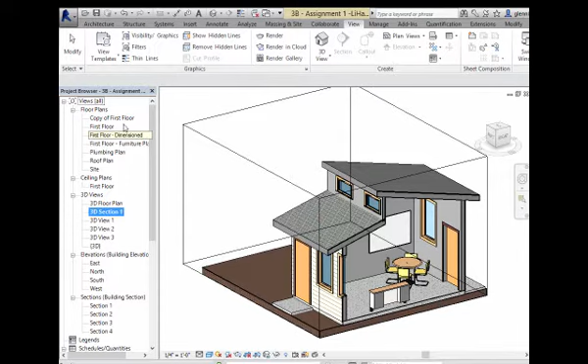Okay. The guideline says that the desk should have about 40 to 50 feet. That's kind of like a 5 by 8, something like that. What Han's actually done here with the desk is kind of okay too. All we really care about with the desk is that you have enough room that you can roll the chair back, and you're just aware that objects actually have a little clearance room that you have to leave for them too.

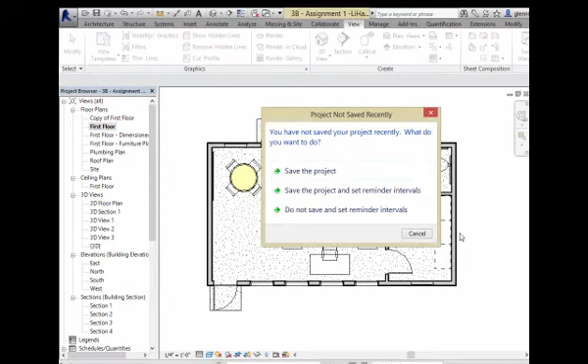A really good question. An eagle-eyed observer noticed that Han found this really groovy whiteboard component somewhere. So where'd you find that? Just Google whiteboard Revit family. I can get the website. From like Revit City or it was some website. Yeah, no worries. So, was that? I just found it on Revit City. Oh, good. Beautiful.

Do two things. A, be opportunistic about finding things. You don't have to model everything from scratch. B, when you find things like that, share them with each other. So actually, Lottie, why don't we even do this? Let's set up some space on the CEE server where people can just, in fact, I promised to put my BIMtopia library out there to share all my pieces with people.

Let's make a deal that if anyone starts finding cool components, we share them with each other and put them in a big master library. Because really, it's like crowdsourcing. I want the power of 50 to all help us help each other. So keep track of some of these individual components you're using, and we'll get this set up in a way that we can start sharing them. We all have very similar needs, so we might as well start building a common library of some of these things.

Okay, let us go ahead and proceed to talking about annotations. That's the next step in this whole process. And to do that, I'm going to switch over to this view that we call the dimension view. So here's the deal. We didn't ask you to put annotations on the first assignment, but you can if you want to. Again, because I said that, don't immediately rush out and do that. You don't have to for the first assignment. But here's where it's going. From here on out, we'll start annotating our drawings and putting dimensions on them.

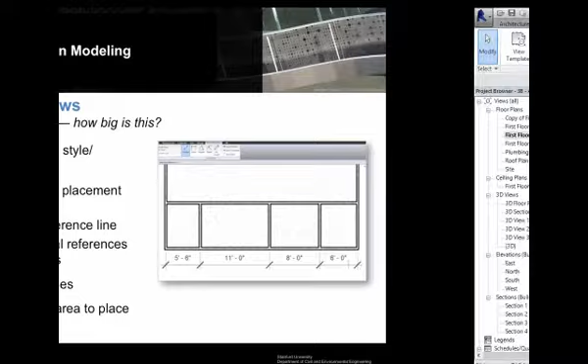We always go through and put something in called a witness line, and we can point to reference lines in the walls and pick those. Let me show you what I have in mind as we go through and pick things for doing dimensions.

So back over here, let's start horizontally first. I want to go through and put some dimensions all the way across this building to illustrate things. There's a couple of questions we might answer.

Just so I can see things more clearly, I'm going to temporarily turn on something called thin line view, so the thickness of the lines isn't obscuring the detail. To do that, under the View tab, choose Thin Lines. It's also up here. What Thin Lines does is make it easier to spot the layers of the wall when I'm zooming in.

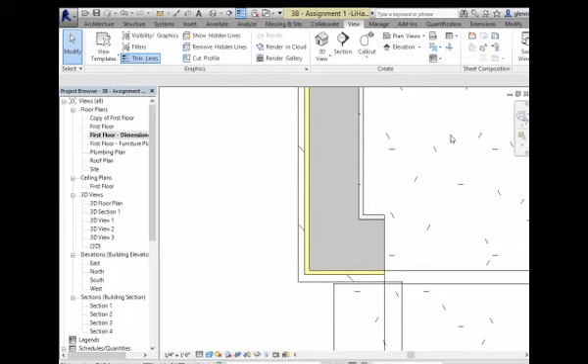So let me come back over here. So I've got Han's walls. Here's what I'd like to do: I would love to have a dimension that shows me just the entire length of the building. At a high level, the biggest thing I want to know is how big it is - how wide, how tall - just to figure out if it's going to even fit on the site.

So how I can do that is I go to the Annotate tab and choose from these many different types of dimensions. I have aligned, linear, angular, radial - all sorts of different types. Nine times out of ten, you're going to use aligned.

What aligning does, just so you know, is it'll go through and follow a wall surface. So if you have horizontal and vertical walls, or walls that line up nicely in X and Y, it'll present those just fine.

Let me see if I can get the help to show up... it isn't going to. Trying to get something to pop up, and it's not helping.

Okay, aligned dimensions go through and follow the wall - so if the wall is moving diagonally, the dimension will follow the wall. Linear dimensions do the other thing: if you have a wall that's diagonal, it'll measure it in X and Y - horizontally and vertically. It just depends on how you actually want to show the dimensions.

So let me see if I can get it to pop up again - that's angular, come on linear, give me the balloon... it's not going to do it, just because it doesn't want to cooperate with me. It's going to pop up in just a second when I don't want it to anymore.

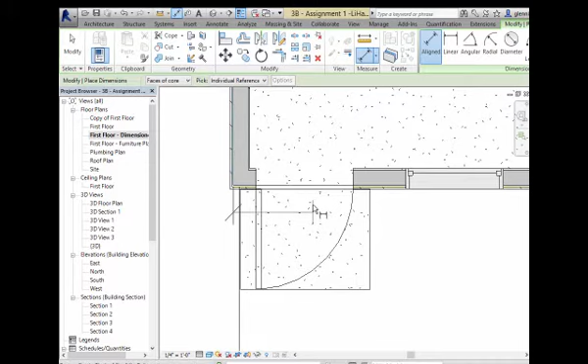I'll come back over and grab this one over here again—inner face, outer face. I'm going to get the outer face and put that dimension in.

You see, it doesn't make a huge difference, but it does make some difference. It's really 31 foot 4 3/4, versus 31 to the wall center lines. We'll learn to be precise about that, but for this assignment, don't worry if you're not precise. If you have everything just hanging to the wall center lines, no problem.

But ultimately we start wanting to dimension to the face, and the reason is if you think about how this thing is going to be built—you're probably going to put the concrete slab down first, then someone lays out lines on the slab for where the walls will be. When they measure, they'll figure out where the edges of the wood walls will be, not where the outer surface is. They want to measure to the face of where they're going to build, and that's why we go to the faces of the core.

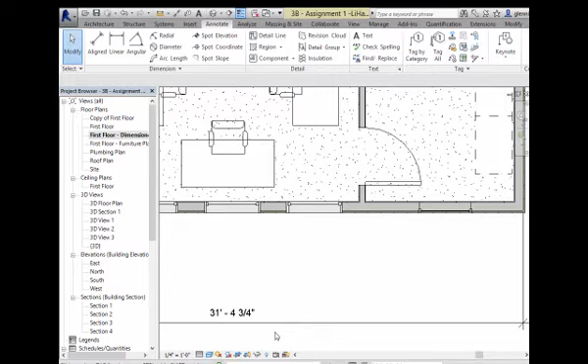So a really good dimension to put in is a big overall dimension, and maybe I'll do one in the other direction too, from the outer face here to the outer face here. So at some level I know this is a 31.5 by 17.5 foot building. If you gave me no other dimensions, that would at least get me going—I'd understand at a high level where this thing fits on the site, what's going to happen here.

At a second level, here's what I'd love to see—to help the person who's actually going to lay out and place this wall and that wall, it's really good to have a second dimension showing the distance to the walls that intersect the exterior. So for example, I'd love to have a dimension that goes here to here, and another that goes here to here. I like them both because I can then measure from this side or that side and get both pieces of information.

So I can create the dimension by coming over here. For this middle wall, you can decide which side to go to, the left or the right—doesn't really matter, just be consistent. I can put a dimension in here, then come over and put a second dimension here to here and drag it in.

Now that was kind of okay—I managed to get two different dimensions in there, but you might actually start to think about this not as two separate dimensions but as a single long dimension. That's actually a better way to put them in. The reason it's better to put them in as a string of dimensions is that if you go through and move one, you'd like the other to move too—you'd like them all to work together.

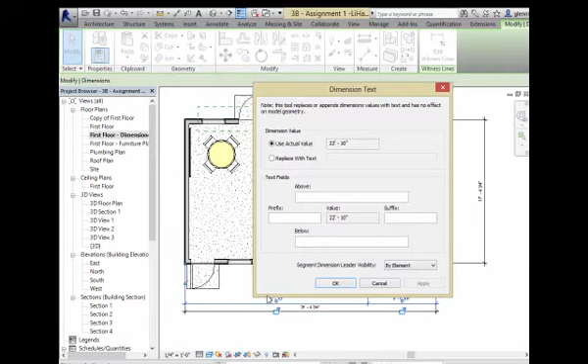If that's not what you're after, if you really just want to move something, select the thing, choose the wall, and it'll activate the dimension. Notice there are actually two different dimensions shown right now: the dimension you placed, and also the temporary dimension measured to the center lines of the walls. Just use whichever one you want. If it's blue, you can edit it. That's basically the rule.

So we'll put a dimension that way. I'm going to put a dimension going in the other direction too, from this wall to that wall. You might have to zoom in to get it accurately. I'll come back over here. So we've got dimensions going in two directions.

This is a pretty darn good looking set of dimensions. I actually like to pull dimensions and be consistent about it. You'll find that as you're putting your drawings together, you could have dimensions all over the place. The big walls are probably enough to get the dimensions you need. You probably don't need to show the dimension between here and here, or a lot of other dimensions at this point.

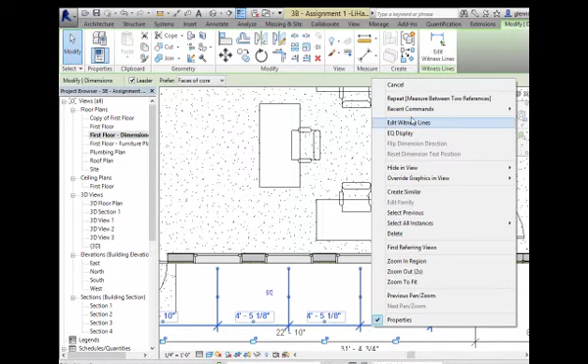If you want to change something about the dimension line, for example, I'll go ahead and extend it. I'll edit the witness lines, take it over and add that in there again. The dimensions seem to work out pretty good. But I tend to put dimensions in floor plan views. I tend not to put too many dimensions in elevation views.

Because in the elevation views, a lot of the information that's critical, that the first floor is at 0 and the roof's at 9, is already there. So you don't need to dimension everything on every drawing. In fact, it's almost better not to. It especially used to be that way when things weren't automatically dynamically connected. You'd put a dimension on one drawing, change it on one drawing, and it wouldn't change on the other drawing, and there'd be an inconsistency. We don't have that problem with BIM modeling anymore.

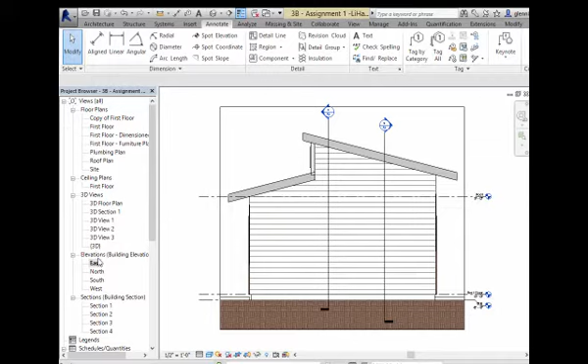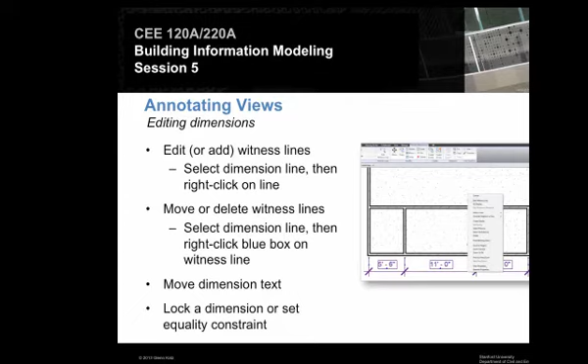But it's good to put your dimensions in a very consistent place so people know where to look for them. So it's nice to have a floor plan view that's nicely dimensioned. Okay, so dimensions is definitely the start of where we're going with all this. You can edit the dimension lines by changing the witness lines. That's these little guys over here. And within all that, there's this whole notion of the equality constraint.

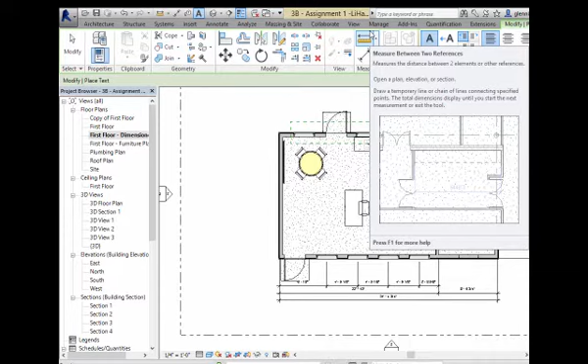The next type of annotation I want to tell you about is just a piece of text. And that's easy. You don't really need to spend much time thinking about that. On the Annotate tab, there's a text tool. Use text judiciously. Now, there are times when you just run out of time, you can't find the perfect part to model it, or even here, it may not be perfectly obvious that that's a whiteboard from just looking at the floor plan. I can tell it in the 3D view.

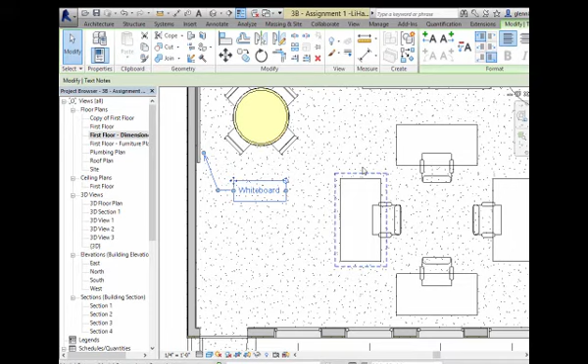So if you need to, just go ahead and put a whiteboard in there. I'll say that, hey, that is basically a whiteboard. And add little pieces that are going to help tell the story. Now, text doesn't have too much in terms of interesting properties. There's a notion of different sizes of text and the font style and stuff like that. Those are all type properties.

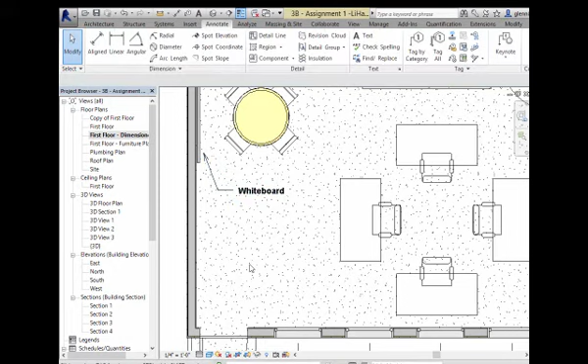So for example, I want my 3/32 inch Arial type family to be bolded. I can turn on the bolding. Just so you know, by default, that's the size it would actually print out on the sheets, 3/32 inch tall. Now, I tend not to do it that way. I'll set up some types based on the use of the different types of text. So for example, I will create a type. I'll duplicate this, and I'm going to call this my floor plan notes.

Okay. And then that'll have one specific type and style. Then I'll create another type for a different use and give it a different type and style. And it's actually a little more powerful for you to think about the use and then be able to control things based on the use. Because if it turns out my floor plans are getting really crowded, I can change all the floor plan notes and just shrink them up a little bit. That won't affect everything. So, start thinking about things in terms of how they're used as opposed to just literally the size. Okay, so you can do that.

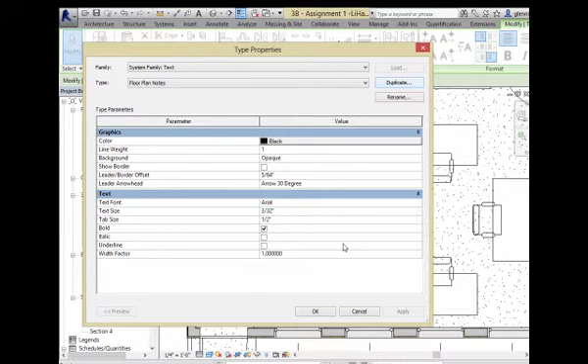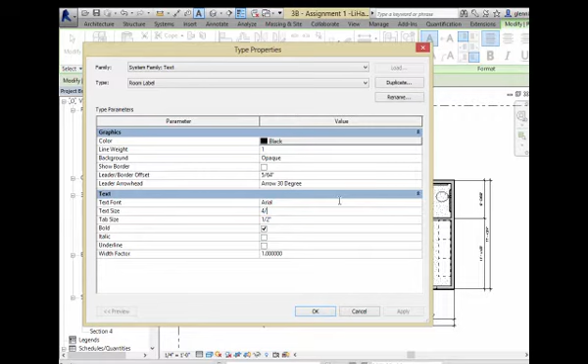Another thing you can do is, I'm going to put just a label on some rooms. So I take a piece of text. It won't have a leader. Let me create a type for that. I'm going to say that there's going to be some sort of a room label. And that'll be a little bit bigger. Instead of 3/32, I'll make it 4/32. Okay. And this is going to be my workroom. Or storage, or whatever I want it to be. Again, I can center that, move that around.

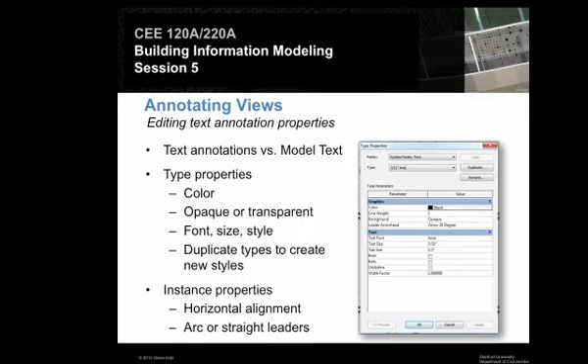Most people get the idea of text pretty easily. Text is kind of cool, but it's not quite as powerful as the next thing we want to show you. So, file text away, it's useful, but really pay attention to the notion of something different called a tag. Okay? Tags are like smart text. Tags are all about putting markers in the drawing that refer to information that can be pulled out of the building information model, pulling text out of the database that's behind it. So we have lots of choices about what we want to show.

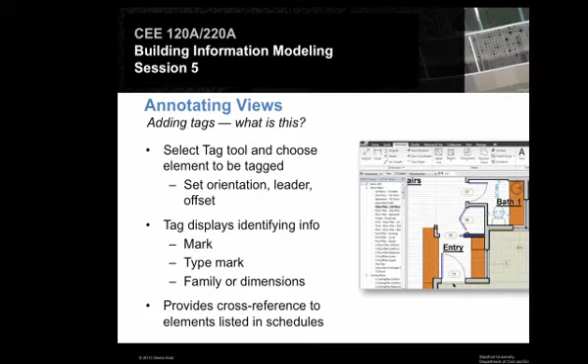A very common type of tag we put in is door and window tags. Because you have this window hanging out in the floor plan. It's looking okay, but you'd really like to identify that window in some way that you can correlate it back to what showed up in the window schedule and tie that all together. So let's come back over and take a look at your window schedule. I have some windows in here. I have type 46 windows, type 74 windows, type 76, and type 77.

Okay. The windows are actually showing up with what's called a type mark. A type mark is an identifier that's common to all the things that share the same type. You can keep them like 46, 74, 76, 77. That's the default. I tend to name my windows A, B, C, and D. But it's just some marker that links this piece of information in the schedule back to what's going on there. If you want to change your type mark, no worries. Just put a new mark in here. It's going to change all of those. I'm going to say fine. That's going to be my B window.

What am I doing? I'm just changing values in the database. But what I'm doing is changing all the windows that have that same type. And again, use whatever scheme seems to make sense. I like to keep my type marks very simple. I tend to number doors and put alphabetic designations on windows, but every office has its own way of looking at this. So I just change those designations. So I know the A window is 3x4, the B window is 3x5. Okay, that's looking pretty good.

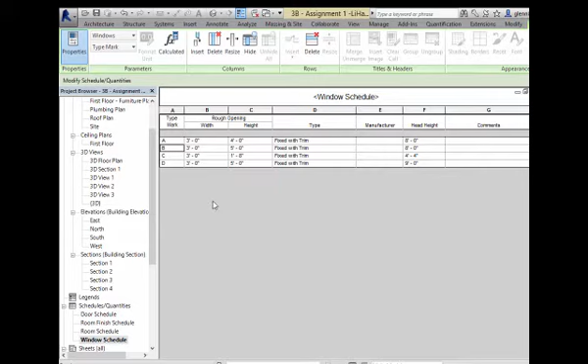Let's go back over to the floor plan. I would love to identify the windows here so you could tell whether that was a 3x4 or a 3x5 window in the floor plan. And how you do that is we use this thing called the tag. Tagging shows up under annotation. It's next to text, the next thing on down. And tagging works like this. I can tag by category.

Within that, I have this notion of something called a leader. That's like a little line that connects the tag back to the object. I'm just going to leave that in for now, accept the defaults. I'm going to hover over that window. And notice when I hover over that window, it's going to say, oh, that's a window D. That's a window D.

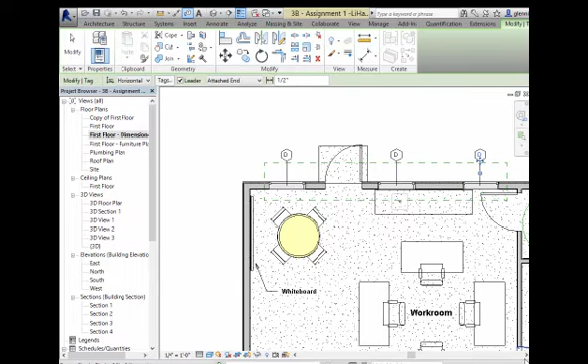That's a window A. That one's a B. See if I can get it on the outside. Oh, actually, it's going to sit at the outside. That window's actually probably inside out right now. We'll figure that out in a second. If I choose the window, let me edit them. Yeah, the inside's out, so I'm going to flip it out. I'll move the tag over to the side.

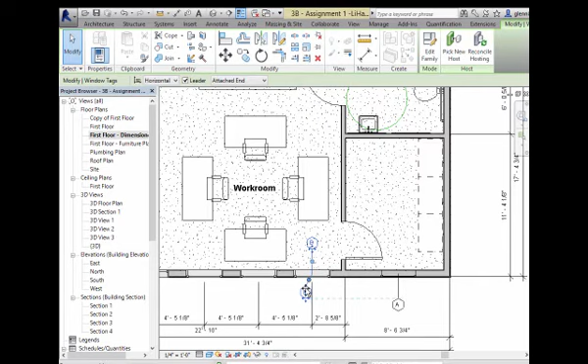Okay. But tagging just gives you an interesting way of connecting things back. The cool thing about tagging again is I can look at the floor plan, tell that the A corresponds with that schedule. So I got my A's, I got my B's. Sort of gets to a question that some people have relative to the assignment. People are sort of saying, well, where should I put the schedule? Like in the sheet views.

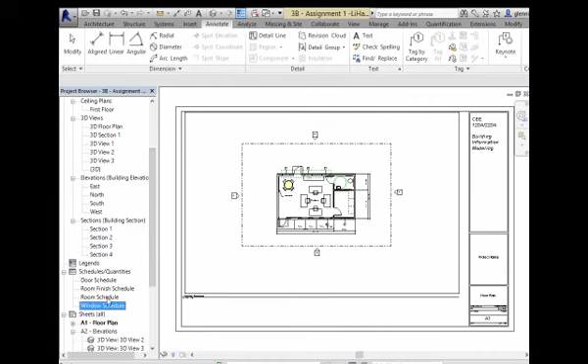And what I'll tend to do is, if I got my floor plan view, and actually what I'm going to do is put the detailed one in there instead. Or dimension one in there. It's a little big right now. I'm going to crop that down in a few minutes. But what I can then do is take the window schedule and just put it in the same view. And the nice thing is if I do that, someone reading this thing can say, oh, B, B, A, and read the information they need. Get more of the story told just kind of in a single view.

So tagging actually works out really well in floor plan views. What I tend to tag as a starting point, you can really tag any of the objects. Again, the tags are only a single view. I'll tend to tag the windows and the doors just so I can get the corresponding schedules. So I can go back to annotate. I'll tag that one, that one, that one. If you got to put a lot of tags in there, I'm going to show you another way to do it. Let me just flip that one. Leave the odd man out.

Tag by category. Another thing you can do is actually just tag everything that is of a certain category. So it's not going to be very dramatic. There's only 4 of them here. It probably wouldn't be that hard to tag them individually. But if I want to tag all the doors really, really quickly, as opposed to just tagging by category, I could go ahead and say tag all, and it'll give me some different categories. Well, what things would you like me to tag? And I'm just going to choose doors right now. So I'll say all objects in the current view, so all the doors in this current view.

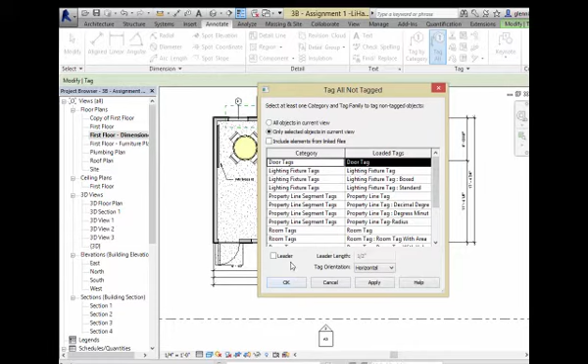I could say all the objects on the selected objects. You can sort of get a choice. You'll notice there's a lot of things we can tag in here, rooms, walls, and stuff like that. I'm not going to tag them all, but all the information is available. You could go through and tag any walls to show what the wall type is. You could tag every piece of furniture to kind of show a little bit of information what it is. I'll just stick with the door tags for now. I'll give them a leader. And I'll say either apply or OK.

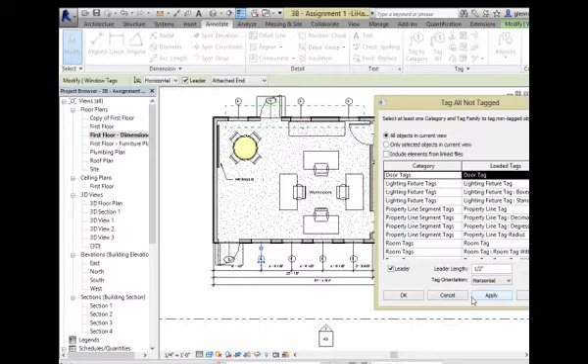Actually not showing that there. Let's see if it's OK. Why are they not showing? Let's go back. Tag all. I'll think about that in just a second. Oh, instead of the selected object, I'm going to choose all the objects. I'm sorry, that's what it needed to be. Okay, so that'll put the doors in. You'll see that's door 3, that's door 4. Over there is door 1 and 2. There's door 1 and 2 over there.

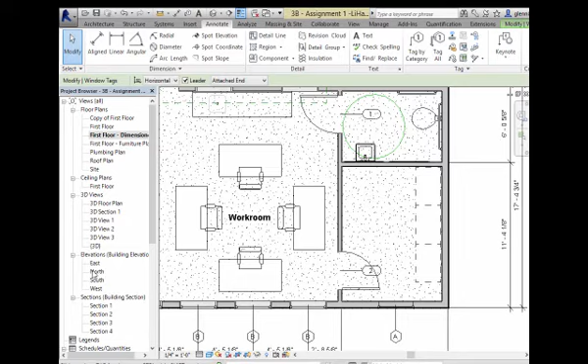Tagging is sort of a really good way of getting things put together. A nice thing is, if you have the doors and windows tagged in the floor plan view, you can also tag them in the elevation views. That's actually kind of a nice thing too, so people can make the correspondence between the elevation. So over here, I got that view of the front of the building. If I would like to tag that, I can say annotate. Let's go ahead and I'm going to tag all the windows.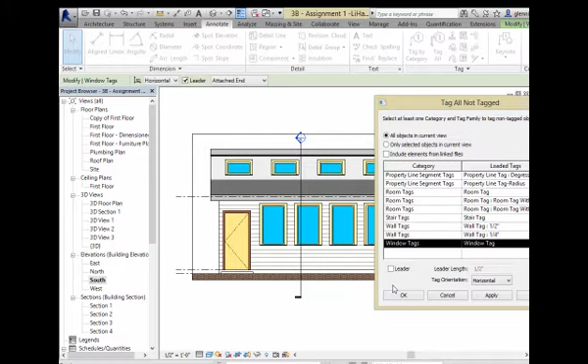I want to get the doors too. I can get that; I'll Control-click to get that. Let me say all the objects, all the doors and windows in this view. I won't put a leader. It'll sort of show up in the center. So real quickly, I have this, again, correspondence between all the different windows and the callouts for what they are. So tagging is a really incredibly useful thing.

And we're going to learn to go through and actually change the tags so that as opposed to showing the type mark or the individual mark, we can show the family name or the height or the width or whatever property. Any property that you can pull out of the database can show up in those tags. Okay, anything you can put in a schedule can show up in those tags.

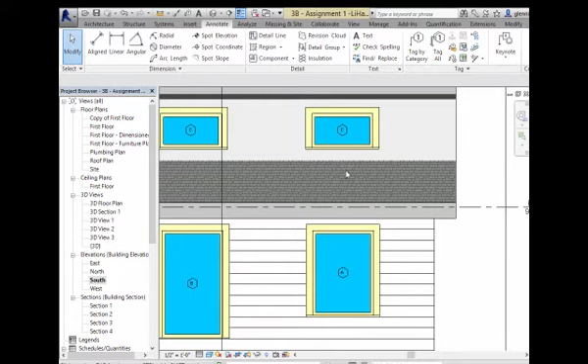Is it too much to put all the dimensions and all the tags in the same plan, or should we do two different? I tend to keep them together. So yeah, I think a good looking floor plan often has dimensions and tags kind of all hanging around in there together. You might want to take the furniture out or something like that. Like in this dimension view, if this is looking a little cluttered, I can go to visibility graphics. Maybe I'll take the furniture out.

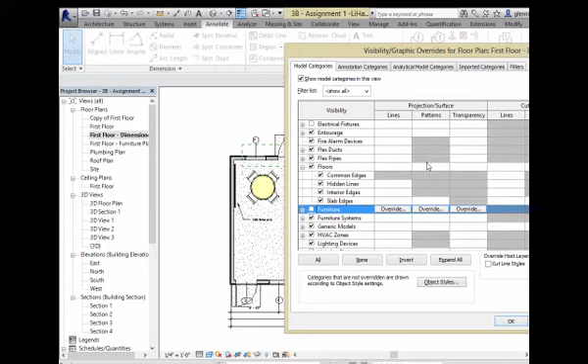Maybe I'll even turn off the shading in the floors because the framer probably doesn't really care about that pattern on the floor. Architecturally, I do. But you know, maybe that looks a little bit cleaner. You sort of think about who's really looking at the drawing, what information do they need, and try and give them just the information that's going to be most appropriate. Because excess information may just clutter things up and kind of confuse them.

Okay, so we've got these different types of views. We've got these floor plan views. We're annotating them. That's kind of cool. Let me go through in our last little bit together this morning, talk about just some of the other types of views, how you create them, how you control them, and get them on the sheets, including schedules. So, Lottie, don't let me get out of here without schedules.

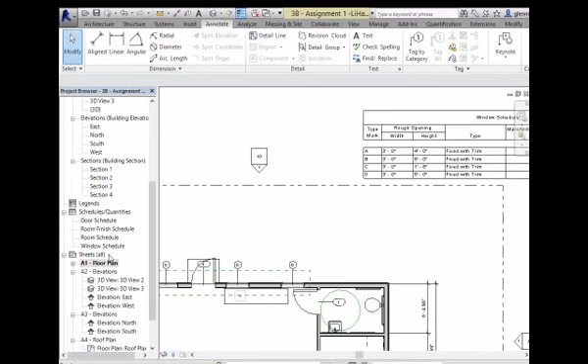Okay, so here's what we're going to do. You got this view, and this view is looking pretty good. I'm ready to drop that on a sheet. You might notice that it's a little big when I drop it on the sheet right now. So one of the things I want to do after I make sure the information's there and I get it all tagged up the way I want, is just crop it down. Cropping is this example of what I call tweaking the drawing to really make it look the way I want it to be. So it's a little bit big for the sheet right now.

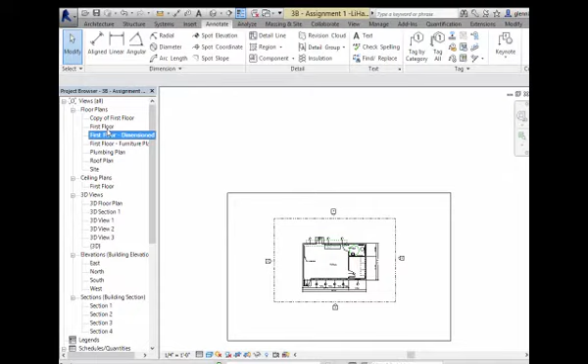If I want to shrink it, I'll choose that view. That's the cropping boundary right now. You decide really what you want to show. If you don't really care about seeing the property line, you just want to see the building, let's pull the crop in so that you're not paying attention to those things. So I can pull the crop in on all sides. Okay. And it'll be much smaller. We can get several different views on the sheet now.

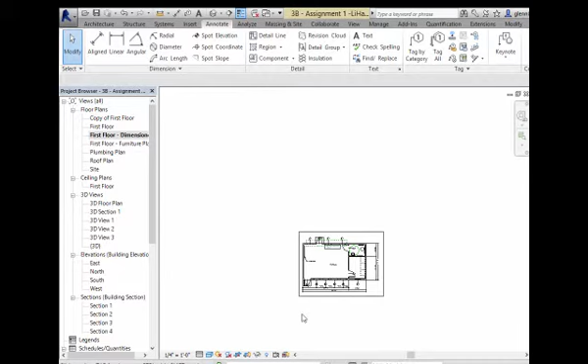Let me go back over to the sheet. Okay, it's looking much smaller. Now I can have room for actually that schedule and the floor plan to be on the same sheet. Now, just as a matter of nuance, the first time you drag a view on the sheet, it actually figures out where the title bar should be. And it still leaves the title bar, even though I changed the cropping, in the old place. Okay, so you could go back and adjust this manually.

There's this whole thing of choosing a view and then being able to, oops, choose the title bar, drag it around, resizing it. I can play that game and do that. There's actually an easier way, so let me tell you what that is. If you ever get your title bar out of sync with the view and you want to fix that quickly, just delete the view from the sheet and put it back on the sheet again.

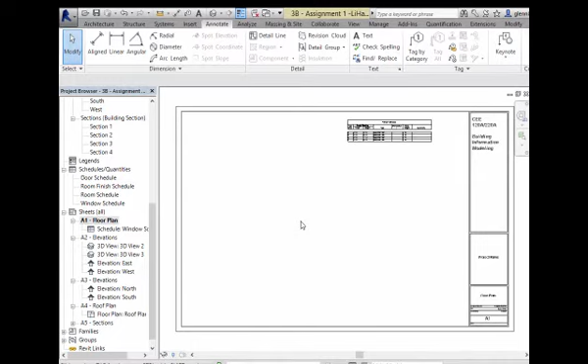So here's what I mean. Here's that view. It's hanging out on the sheet. Goodbye. Don't worry, it's still in the model. It's just not on the sheet. I'll come back and grab that dimension floor plan. And when I pull it back in, it'll resize the title bar just right at that spot. Okay, so now I've got a nice dimensioned, tagged view. I've got the schedule there. Maybe I'll put the door schedule in here too. Things are looking pretty good.

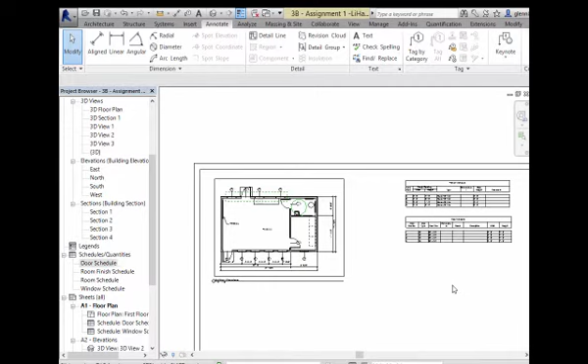Okay, so we're composing our sheets. Things are looking pretty good. Drag them in there. So cropping is one of the primary things you end up doing to your views. Let's go back to that floor plan view, or the dimension floor plan. You can control other things about this.

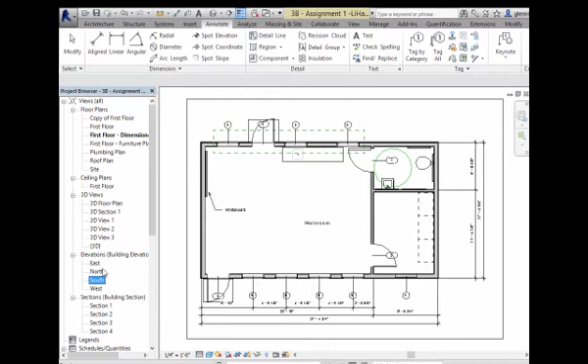You can decide even here, do you want this to have some sort of color information to it? Do you want it to be shaded? Not much color here because it's mostly just the gray. That'll make more sense in the elevation section. Let me switch to the elevations and show you that. So elevations are going to work very similarly. I added some tags in here.

Okay, that's actually cropped pretty well. That's not too bad. I like it. Sections, I might want to keep them in here because then I can see where the section cuts are. That might be nice. It's cropped pretty well. It's colorized. That actually looks pretty good. I can turn that on or off.

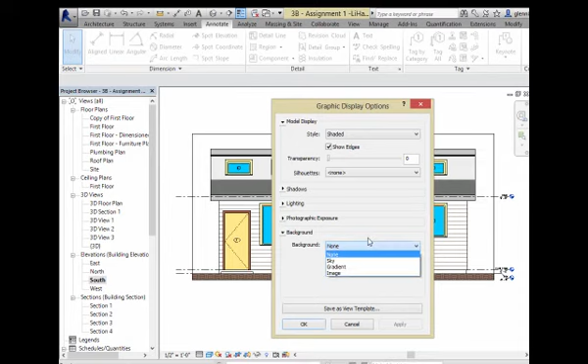Other things you can do, there's actually some really groovy options in here. So under all these view options, you have things like, if you want to put a little background on that, you can put a nice shaded background in there. Make it look a little bit better.

If you have taken 31Q and you sort of know about drawing boundaries and silhouettes around objects to indicate what's in the foreground and what's in the background, a really nice tool that's available to you if you want to make these look a little better is this whole notion of silhouetting. I can go through and put wide lines or really any line style in there. I'll show you what it does.

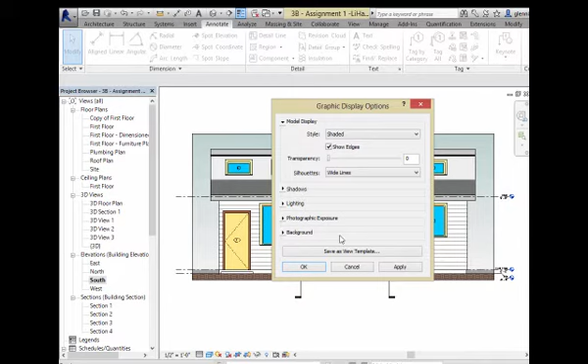Am I in thin line mode? I'm in thin line mode so you can't see it. Why is that locked on? There we go. Not sure if you can tell, it fattened them up a little bit. Let me actually create a different line style so you can see the effect of that a little bit better.

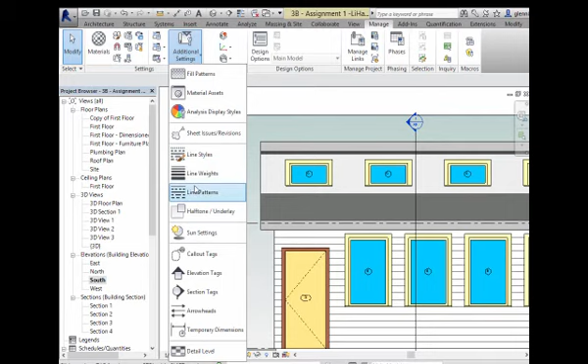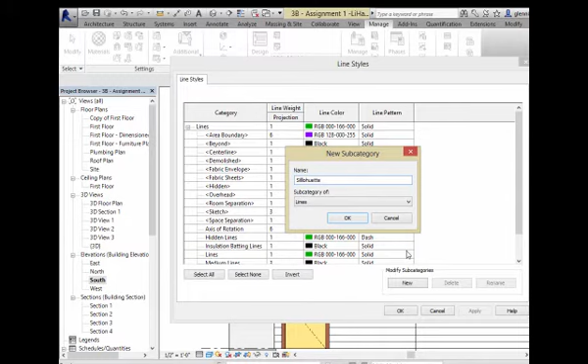I can't spell this word. What? It's one of those words that you don't know how to spell properly. Gauge is another one of those. I don't know how to spell this word. But I do know that I don't.

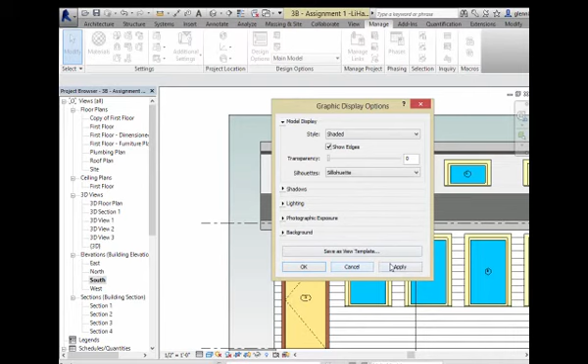Okay, let's make them fat. So over here, if I come over to the graphics properties, I can change them to silhouette lines. Whatever it is, you can start controlling that to really beef up or drop back what's in there. Other things you can do to glam up your views, you can turn on shadows. Wasn't very dramatic here. There's just a little bit of shadow under that little bit of roof overhang.

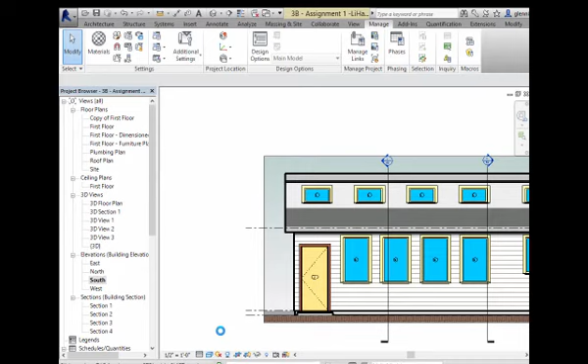Or other things you might want to play with, there's a great view type called realistic. If you've assigned your materials, it'll create something that looks like that. You have a lot of graphic control, but ultimately you decide how you want to tell that story. And if you want several different views, each with different visual styles, maybe architecturally I want to present it this way, but to the framer I want to show it as a plain black and white drawing with very little gussying up. I can make different variations on that.

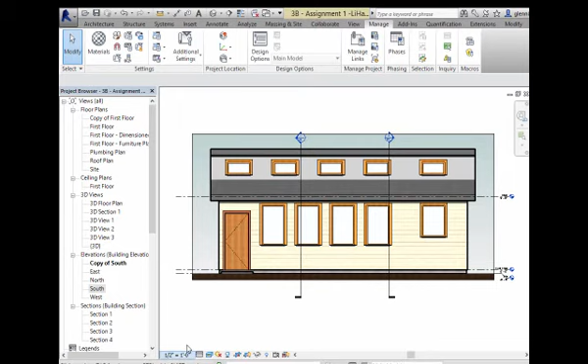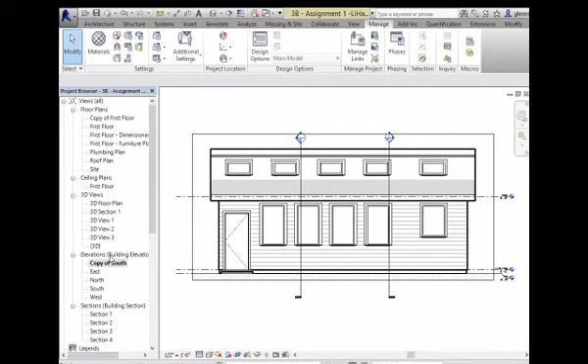And for this view, as opposed to all this gussying up, I'm going to make it just a hidden line view. Turn off the shadows. And then ultimately, I'm going to turn off the background. Okay, so plain view. There it is, fancy view. Again, choose which one you want to put on there.

Now, we talked a little about doing the 3D views, just in answer to your question there. If you want to create 3D views, the big thing is to take the default 3D view, rotate it to what you want it to be, and then duplicate to save the camera. That's your big issue there.

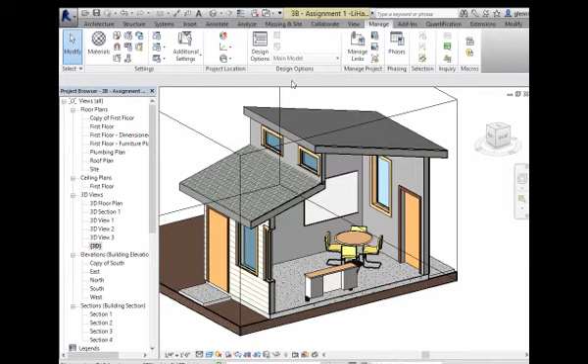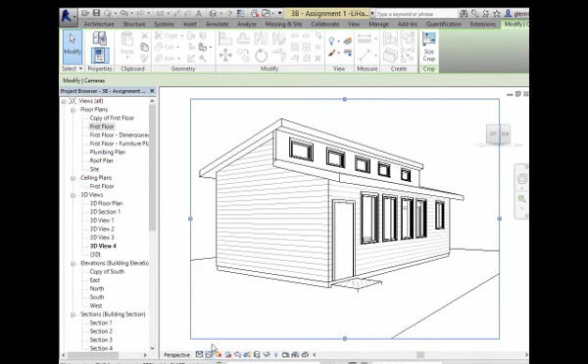The other type of 3D view I'll give you real quickly is the camera view. I think a lot of you discovered this, so let's show you how it works. Camera views are just another type of 3D view that have perspective to them. If I go to View and choose Camera, I can place the camera outside the building, something like that. And again, everything I've talked about in terms of the style of view will all apply.

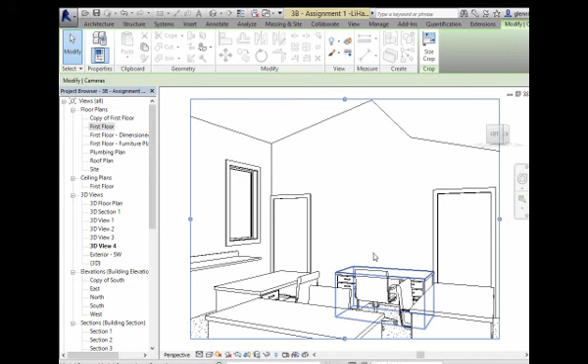That's just that one right there. That's kind of the exterior southwest view. Or if you want to try and actually do this on the interior, again, that'll work too. So camera right from the door here, this dramatic view looking across the desks. And again, I can sort of make that realistic or whatever I want.

Now, for the camera views, you have the option of using a little orbiter tool to look around a little bit differently. Kind of choose whatever you want. You can try zooming it out a little.

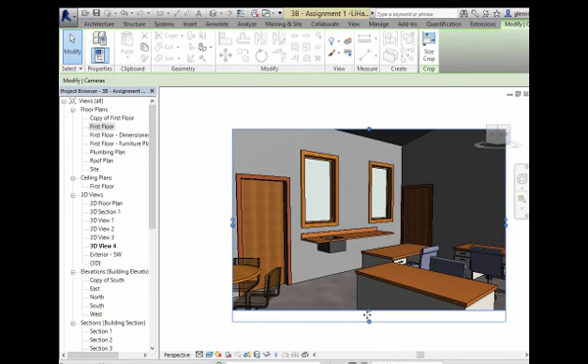I'll warn you with camera views, zooming's kind of a funny thing. You may have experienced this when you are in a building and you try to take a picture. It's hard to get a good interior shot of a building because unless you have a nice fisheye lens, you don't actually see very much. So you can extend those a little bit to show more of the building. Don't extend it way around or you get this really distorted fisheye thing that wraps around. That'll kind of get you in trouble.

But go ahead and again, create as many different views, put them in there. Your goal is ultimately, and the big lesson for today is really, it's all about creating the views you need, getting them set up and annotated and looking the way you want. Tell your story. Think about how you're telling that story. Because beyond that, how you model it gets to be pretty easy.

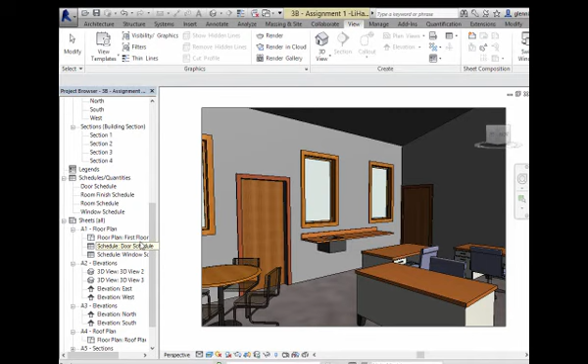Now, I wanted to finish up by talking about the section or the schedules and show you two specific variations on that theme. One is we have this window schedule, and the window schedule is kind of looking okay. But one thing I didn't cover with you guys in class is if you wanted to change that window schedule around a little bit and add some more information. So this is all just information kind of hanging around in the database.

And if we want to start changing that, the schedule actually has all sorts of different properties too, including which fields are shown. One field that isn't shown by default that I'll turn on is the count. The count will actually show me just how many of those different windows there are. It turns out there's 4 of those B windows. I'll turn that on just so I can see that.

What I might want to actually do is add a little information that isn't reported by default. For example, you can see that the height and width and all of those things are reported for the windows, but it's not actually reporting the window area. And if you want to report that window area, what you can do is calculate a value, just like you would in Excel, where you add a new field and give it a formula that relates those things together.

So I could create a new field called window area. I'll say that, what is it? It's going to be an area because it's a linear dimension times a linear dimension. For its formula, I can take a look at what things are available, like width times height.

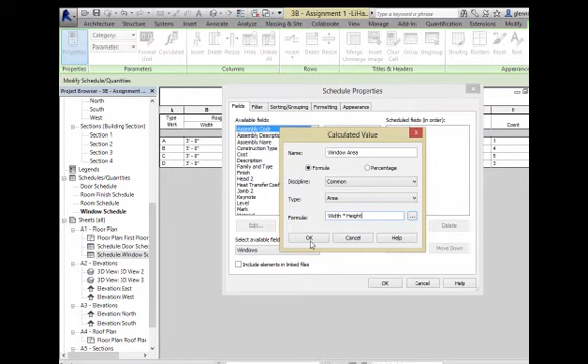And if I add those out, you'll see that we now have an area in there. So we can see it's 12 square feet, 15 square feet for each of those windows, 5, 15. So it's looking pretty good in terms of adding new values, just calculate, add new things, very much like working with Excel—add new formulas to it. The nice thing is if anything changes, it'll go through and update those values for you automatically.

The last thing to show you about schedules that's kind of cool is this whole notion of doing a subtotal. So for the subtotal, let's show you how that would work. All the information you really need to do the total is here, it's just not adding it up for you. And to convince it that you want to add it up, there's really only 2 special steps you have to do. One is under sorting and grouping, you have to say go through and add a total line. So you got to turn that on—that says that yes, I'm going to compute some totals.

The second thing is you have to tell it which things you want to total up, which of those columns make sense to total. To do that, we switch to the Formatting tab, choose the window area, and say make a total on that. Just turn it on, then choose which things to total.

When you say yes or okay, I'll see that's actually 142 square feet. That doesn't look quite right - it didn't do the right thing. Because each of those is 15 square feet, and there's 4 of them, so there's actually like 60 square feet altogether. Don't worry about the fact that it wasn't totaling right.

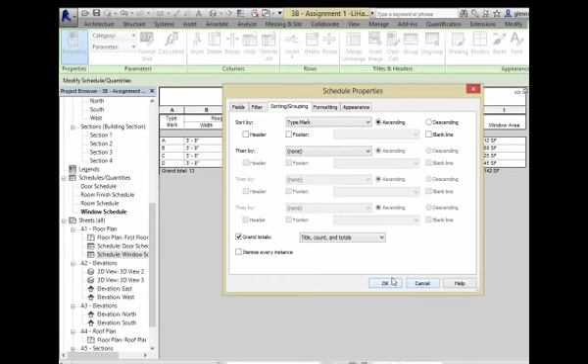So for schedules, the big thing is add any fields you want to. The most common thing you'll probably do is just turn on the sorting, add yourself a total line, and then change the formatting to choose which of the things you want to add up.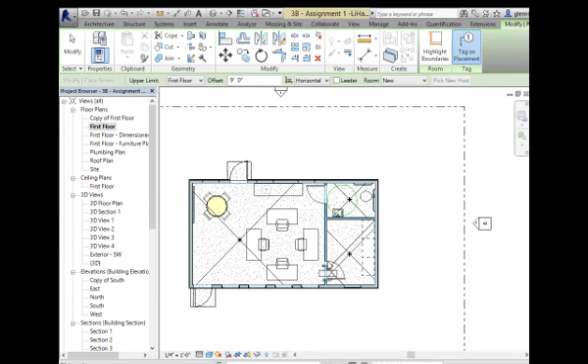There's something else similar to that. If you want to total up the room areas, and there aren't that many rooms in this, that's actually pretty easy to do. There's a room tool - I can put a room. Actually, you already have rooms in there. Hung's already created some rooms. Let's take a look at your room schedule.

Great, so we have a different area computed to those. You already subtotaled those out. That's great. I can add a field in here, or maybe put the room name in here.

I'll put that up before that. So what is that? That's actually my workroom. I'm guessing that one's storage. But all we're doing now is editing the database values. And that is probably the bath.

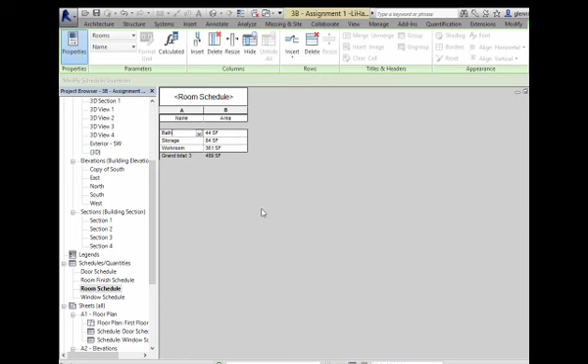Looking pretty good. For the room finish schedule, see how you're doing there. This one confuses some people - these are actually just text values. You'd think the model's so smart in so many ways it ought to be able to figure out what the floor finish, ceiling finish, and wall finish is, but it doesn't. It's actually a little dumb about that. Rooms as an object, we have to add a little intelligence to.

So for this one, if you're filling this in, all we're looking for is just some sort of textual label. For the floor of the workroom, I was going to carpet that. For the bath, that was going to be concrete or tile. For the storage room, maybe that'll be concrete. So those are just text values - just go ahead and add the text values in there, nothing special about that. Just fill in some textual description. Later on in the quarter we're going to learn how to get the model to be a little smarter and actually figure that stuff out for you, because you selected a type, it ought to know, but it doesn't.

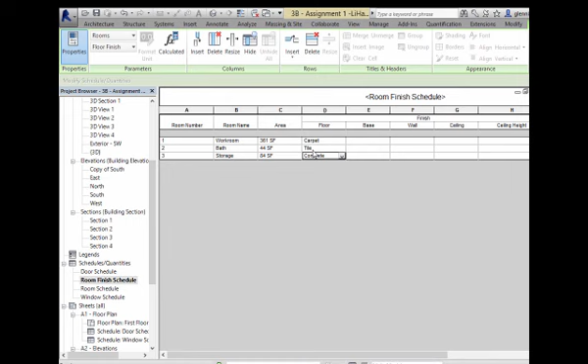Okay, to finish, on my floor plan over here, this is looking pretty good. I can add a room tag of all the different things I want to have in here. Tag the room - whatever it is I filled out. What's it doing? It's pulling the information out of the database that I just put in there, recording those. Just going to give you a really quick idea of what's going on.

That's where we want to finish up today. Go ahead, start thinking about the story you're telling, the views you want to create, the most effective way to thread them all together on the sheets and put that all together. Annotations are a big part of helping make that happen. So go ahead and play with that.